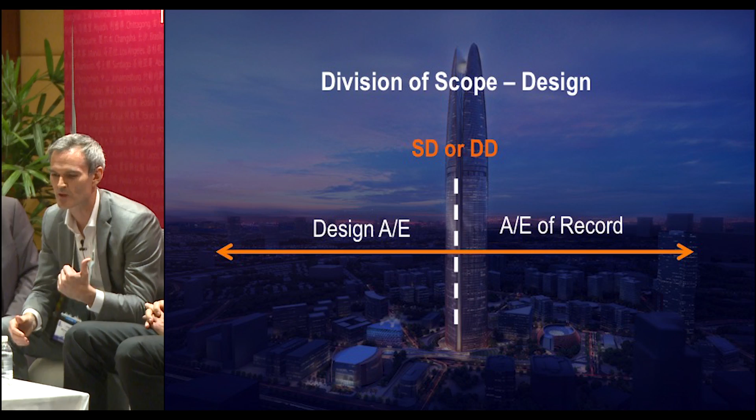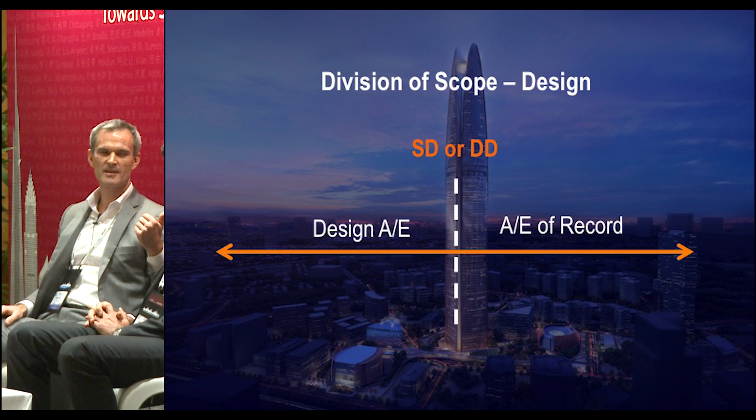This is also specific to emerging economies like Vietnam. This is the current model: we have an international architect and engineer who pass off the drawings at the schematic design phase or design development. This is actually one of our biggest headaches in Vietnam, and the reason is, similar to the contractors, they have an excellent portfolio of work for 20-story reinforced concrete buildings. Is it responsible to let them design a 362-meter tower? I don't think so, and I think this is a real problem.

We can discuss how we get around this later, how we've overcome this situation on our projects. But I think this model is just broken, and even if there is a law in a specific country for these high-rise buildings, it just doesn't make sense.

Local codes, and Billy knows this very well. The Pertamina Energy Tower in Indonesia, it's a 523-meter tower. We're struggling because we want to try to get the cost down. We want to save money on material. And what we're finding is that the local code is saying that we have to design the building with a base shear of 3 times the expected value.

When we went to the local code officials and said, hey look, we'll do a performance-based design, we can show you that the code is antiquated. The code is not meant for 500-meter buildings. The Indonesian code was meant for 20-story buildings.

They came back and said, oh, well, you have to do a performance-based design, but we're not going to let you go below the minimum requirements. So regardless of what the analysis shows, you're still going to have to design for 3 times. We're battling this still. I mean, there's tens of millions of dollars at stake here, but it's certainly not helping the cost or the budget on this particular project.

Material availability. Indonesia, again, you can't get high-strength concrete. I was pretty shocked. I mean, I've been there about a year, but I was pretty surprised. The highest strength concrete they have that's locally available is C60, 60 MPa. If we want to import higher strength concrete, which is probably what we're going to do, we want to narrow down the columns, we want to make the building a lot lighter, it's going to be 2 to 3 times the price of the regular concrete.

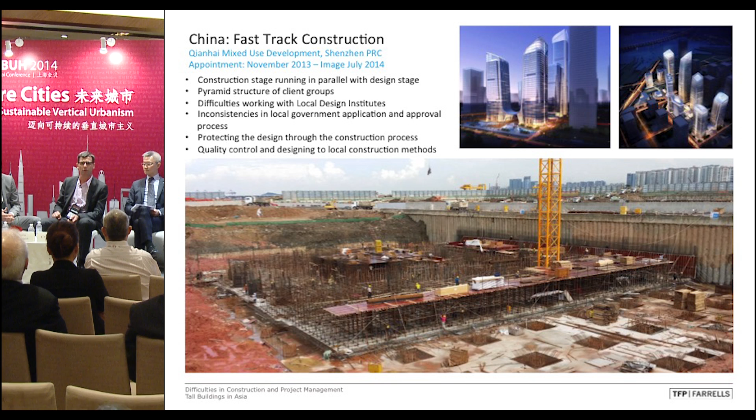But there are projects where the design has been managed in a very interesting, challenging, but also successful way. We're working here in Shenzhen with a client called Excellence Group. We won the competition in October 2013. One of the conditions was they wanted to be on site by the end of the year, December 2013 - so 3 months from concept to enough information to allow the contractor to start with the excavation and the diaphragm wall.

The client was very well organized, had all the consultants on board, had the design institute on board, facade engineers, all disciplines required. We managed within 3 months to prepare a tender package which allowed the base information needed at the time. It was tendered, the project, the full scope, including the curtain walling, all tendered to a single contractor. But we managed to develop the design enough for it to go on site by the end of the year. This photo is taken, I think, in July this year, roughly.

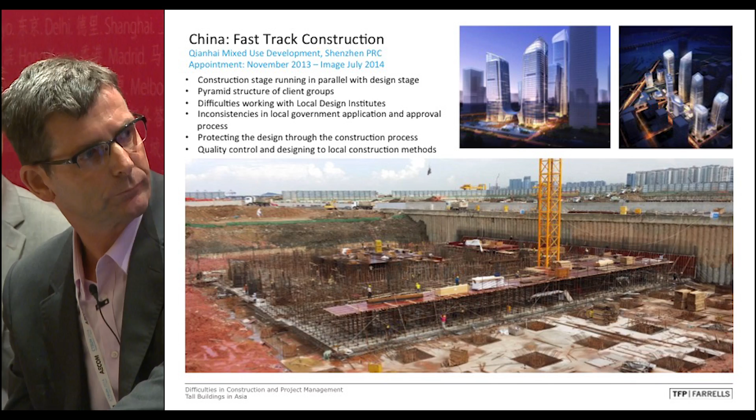So all the foundation has been done. The excavation has been completed. By now, if we were going to take a photo, I think the towers have reached ground level. And we still believe that even though the time frame is so tight, the quality of this project will be very good because of the collaboration between the different disciplines involved, and because of a very dedicated and well-managed client who is involving us in all the important aspects and decisions required for this project.

Now, this is not always the case. I've been trying to source some examples where time is a real challenge for us and where we're running into big problems. One of the projects is in Mongolia, where we work with Kerry Properties, and we're doing an office building and a hotel. The design stage was dragged out a little bit, and then the project went on site.

The first challenge we realized was that they didn't have a methodology to build over the winter, so really they were only building in summer. There were no building regulations. We didn't quite know, do we need to follow American code? Do we need to follow Hong Kong code? Mongolia is not that close to China - they don't really like to use labor from China, they don't really like to use contractors from China. So that was a very complicated setup.

And every winter, somehow the economic condition changed. So by the time the project started again in the next year, the outlook was somehow different. The first year, the client felt there was a boom, and they increased the GFA, even though the site had already started with the foundations. The towers were made taller, the basements were made larger. It's very hard to coordinate and to manage from an architectural point of view.

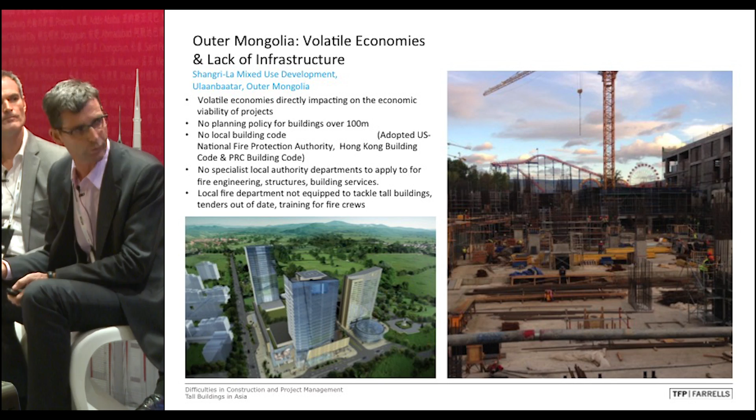We ended up mirroring it. And the project was already on site - the foundations were already built. Very complicated, difficult things to carry out.

And then the next year, the economy in Mongolia was under pressure, and the client felt they wanted to reduce the investment. The whole project was scaled down. The towers were made smaller, and the podium was reconfigured again, and the podium at that stage was already literally out of the ground. So a very complicated construction process, and very complicated for us to coordinate this and to avoid complications on site.

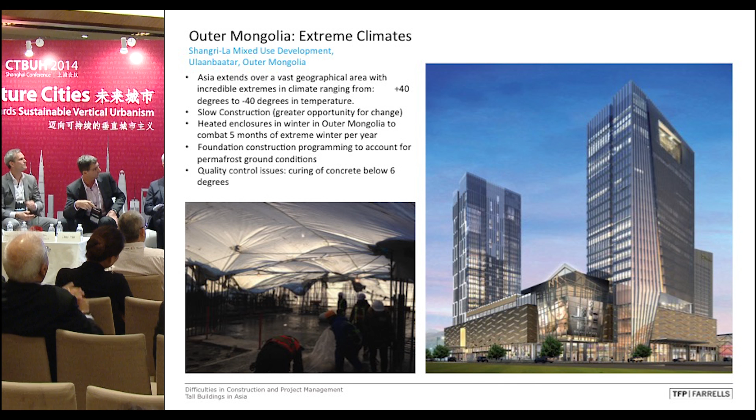Here you can see how they then in the second winter had developed a methodology to pour concrete in a very cold environment. A project which maybe was even more of a venture from our point of view.

We built the tallest building in Cambodia. This is a 200-meter tower. And the significance here is that there was really literally no tower up to that point when we started this project. All buildings are 6 stories.

There is no local labor force. There is no real local architectural firm who has any experience with towers. There is no building code at all. They don't have fire engines or tenders which can cater for anything above 6 stories. They have no planning guideline. They have no restrictions on the GFA. It is just a total open book.

Being able to deliver a project like that was a very, very challenging task. Over the course of the project, the program changed dramatically.

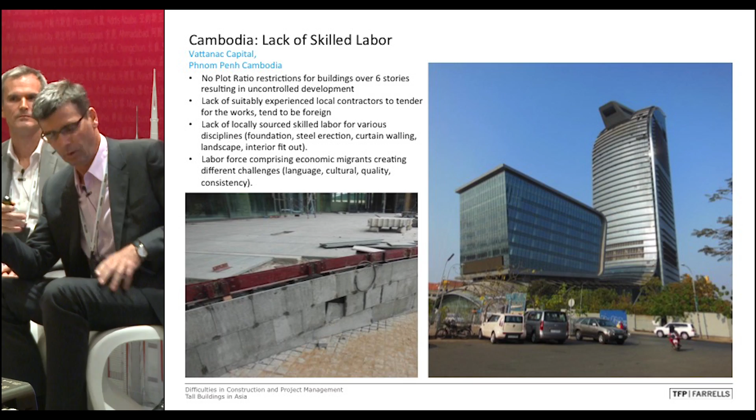When we first designed it, it was a bank who commissioned us to carry this out. They wanted a very strong cultural reference for this building, so we came up with the idea of a dragon's back. The tower was the office building with the chairman's office at the top, and that was the stock exchange, and the banking hall was at the bottom.

Then, with the economic changes in Cambodia, the program changed. The tower became half office and half hotel. This happened already on site, well developed — the tower's superstructure was nearly completed at that stage.

The stock exchange became a service apartment building, and the banking hall became a retail mall. All of this happened well during the construction of the project.

But we're still very proud of the project. It was a very challenging project — 7 years, and it'll be completed this year. The tower is now partially occupied.

Okay, the challenges. Basically, all the challenges that Michael and Stephen talked about, I grouped them into 5 different categories. It's all about time, change, project constraint.

Very often in Hong Kong, for those of you familiar with how developers and architects, consultants work there, we work extremely closely with Hong Kong developers. We start from the feasibility stage, we're involved with procurement, we're involved with just about every decision-making process. So sometimes in Hong Kong, our architects are called the developer architects.

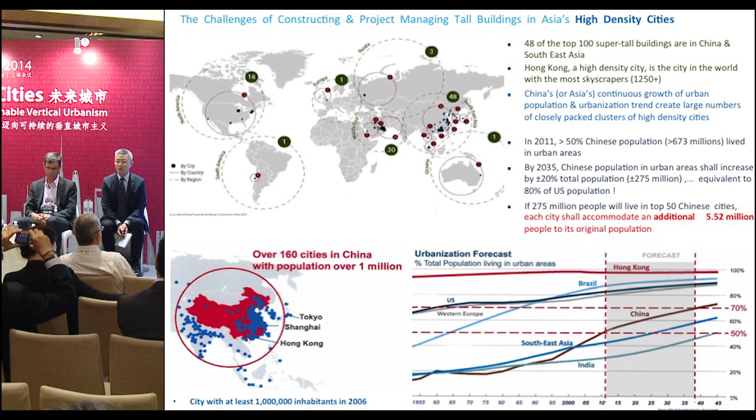There are studies showing that in the next 20 years, the total percentage of the Chinese population in urban areas will rise from 50% to 70%. If you multiply that 20% by the population of China, you're talking about 270-some million people, which is 80% of the United States population. And these people are going to live in cities, in dense urban areas.

In Hong Kong, where we design and are involved with construction, 95% of our population lives in dense urban conditions. So what I'm trying to get at is, in Hong Kong, and also more and more in Asia and China, TOD, transit-oriented development, is becoming more and more popular and successful.

This is an example of a project, Lohas Park. We did a master plan for the Hong Kong MTR company. This is probably the largest residential development in Hong Kong, with 50 to 70-story residential towers. There are 5 schools, a kindergarten, senior center, youth center, car parking, and more interestingly, a metro station and a rail depot beneath this big podium.

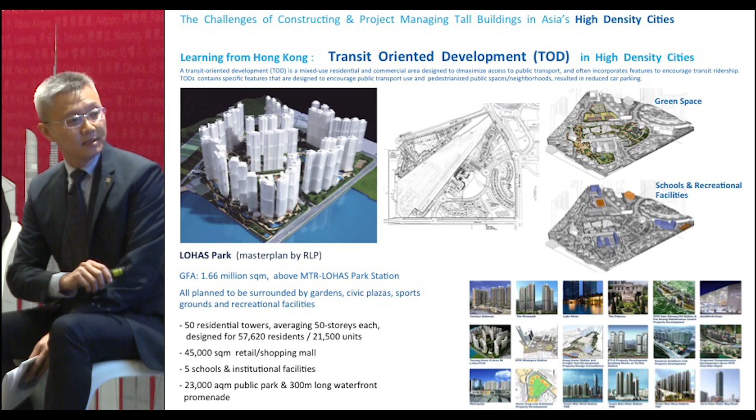This is what we often do in Hong Kong, from the planning, initial feasibility study for the MTR, and then we eventually get involved with some of these developments. Usually a site like this will be divided into maybe 9 to 13 parcels, packages, and then the MTR would tender with various developers in Hong Kong, and it would be built separately.

For the last 20 years, we've been working on quite a large number of TOD-related projects in Hong Kong. I think we've been involved with about 30% of all the MTR stations' topside development.

Now, currently, we're doing a similar kind of development in Shanghai, just right outside Shanghai in Minhang. Without going into too much detail, once again we're building this entire development — we're talking about 450,000 square meters of development, residential, these 40-story residential townhouses.

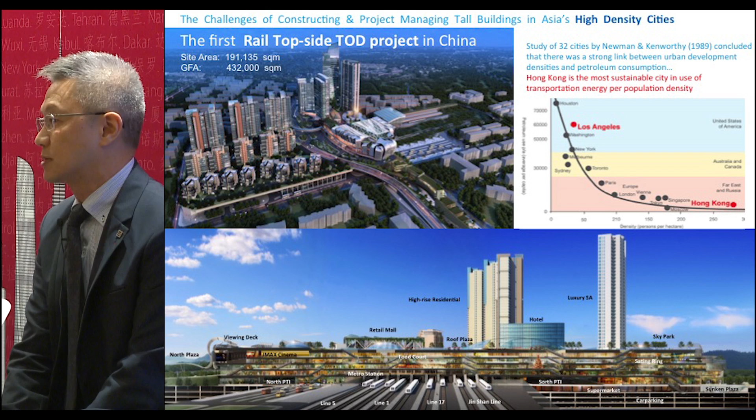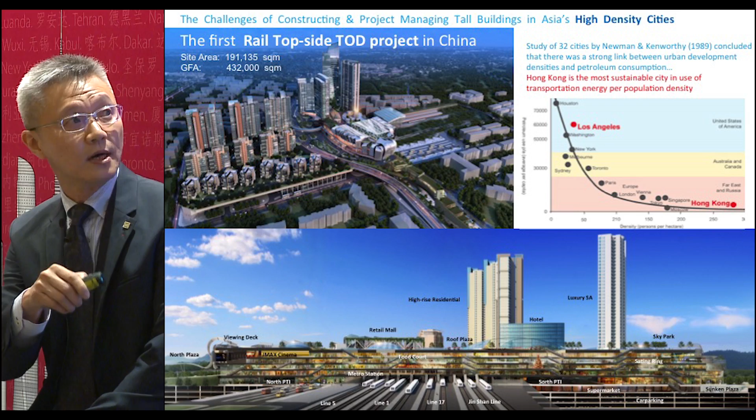Now, just to go back, I'd like to show this chart. Surprisingly, for Hong Kong, if we take the energy used for public transportation by the population, Hong Kong turned out to be the most sustainable city in terms of public transportation energy use per population, compared to North America, Los Angeles, a heavily automobile-based society. So this is not just a model for high-density urban development, but also for TOD projects—residents spend more time with family, colleagues, and leisure, and a lot less time in traffic.

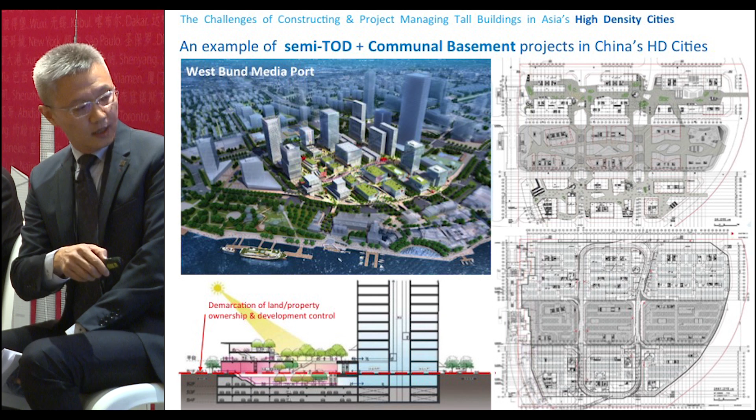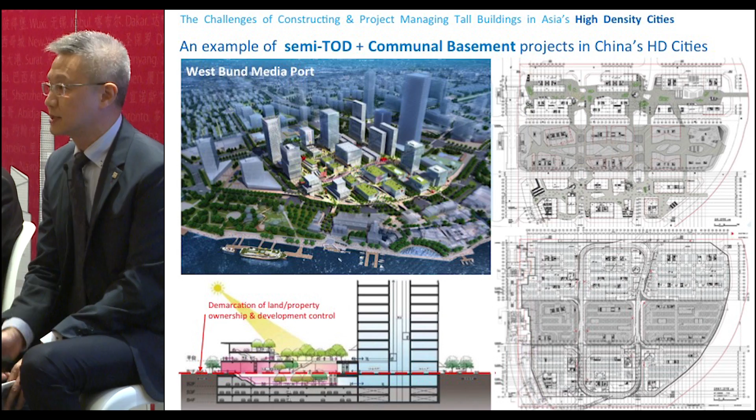Now, slightly different, but in a way similar. In China nowadays, when there are large urban developments, very often the municipal government will set up a managing operating company, and then build a communal basement for all the topside developments. We are currently working on the scheme for the West Bund Media Port, where there will be many performing venues and commercial residential development, and we're working on the communal basement coordination and design. This is a development model showing that in high-density Asian cities in the future, in the next 20 years, consultants, contractors, and developers dealing with a single site for a tall building will have multiple owners, many shareholders, and infrastructure controlled by other parties. I think that's the context—those are the challenges we're going to be involved with.

Thank you. Now, to summarize, in the early stages of any project, clearly the selection of the architect or design team is one of the most important decisions any developer makes. We've talked about the split of responsibility—whether the architect should do only design up to schematic design or design development and then tender the project on a design-build basis. In China, we have a different challenge: no foreign architectural firm is able to carry out complete design from A to Z, because of the necessity of using a local design institute, or LDI. That's why many developers are comfortable stopping the design at a certain early stage and either handing it over to the LDI, or in other countries, awarding it on a design-build basis.

In China, many international developers and multinational companies have developed a way to bridge the gap between performing a certain level of design and then handing it over to somebody else. They've come up with the concept of the executive architect, retained by the owner or developer to oversee detailed development, detailed design, and later also oversee procurement, making sure specs and proper coordination are done. I believe Chia and Stefan have been involved in projects in China with a similar executive architect role. Stefan, does this work? Does it bring added value? And without that role, would the project still be the same?